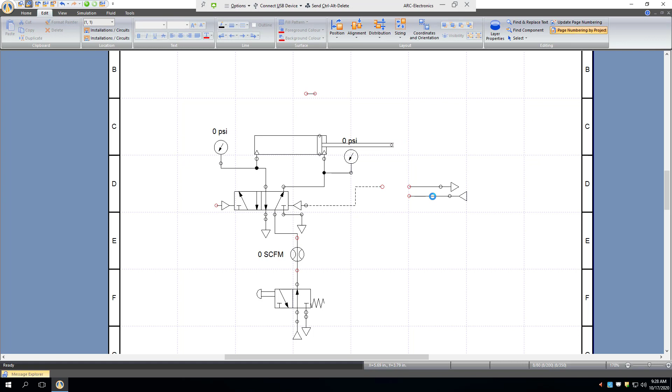Okay, we're starting now from our project that we just completed, Part B, and we need to eliminate many of the components to get back to the diagram which they're showing. So let's go ahead and get rid of that valve, and let's get rid of all the control piping and exhausts, this valve piping. Good.

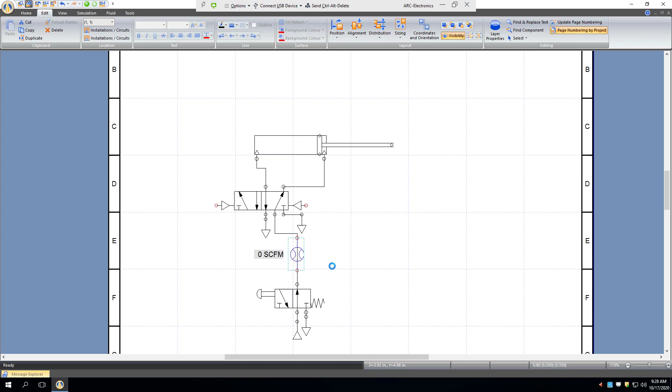And it looks like we're getting rid of our measuring and our flow control. Okay, that's good for now. Let's see what's going on. Okay, that looks like a good start.

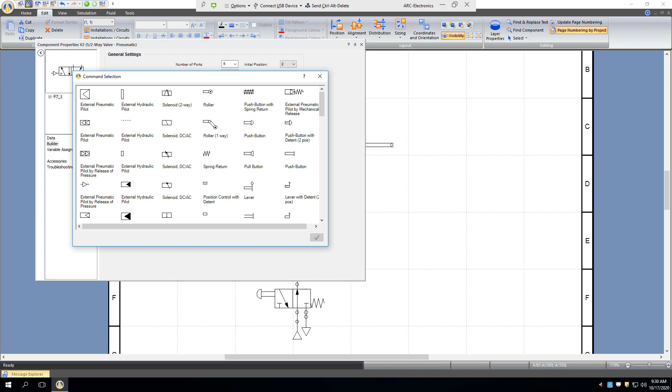So let's go ahead and open up our valve. And we're going to go to technical specifications. We're going to go to builder. And we are going to get rid of our pilot valves. And we're going to put in an AC/DC solenoid on both of them. And that looks good.

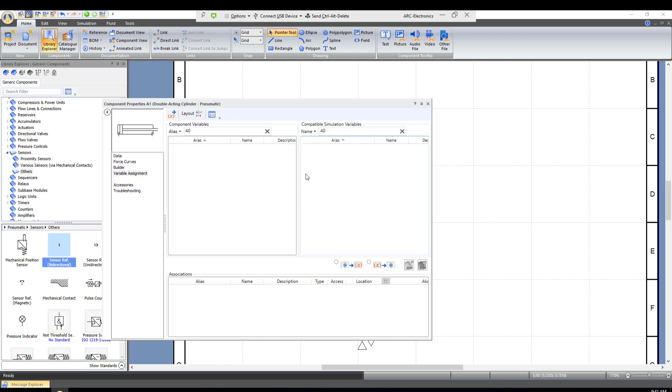The next thing we need to do is go back to our Library Explorer and go back into Pneumatic and go down to Sensors, Others, and we're going to grab a reference sensor. And this is at the 0%, and we're going to call that A0. And we need another one. But first thing we need to do is open this up, go to data, and we need to run this out to 100%.

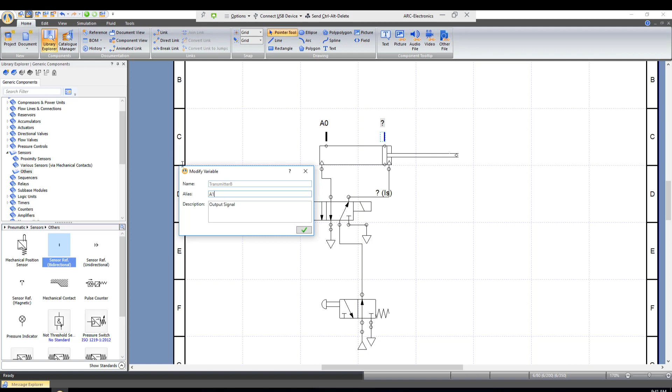And let's grab another sensor, and we're going to match up our triangles, and we're going to call this guy A1. Good. And then they want us to bring this back to 0. So let's go back to data and 0.

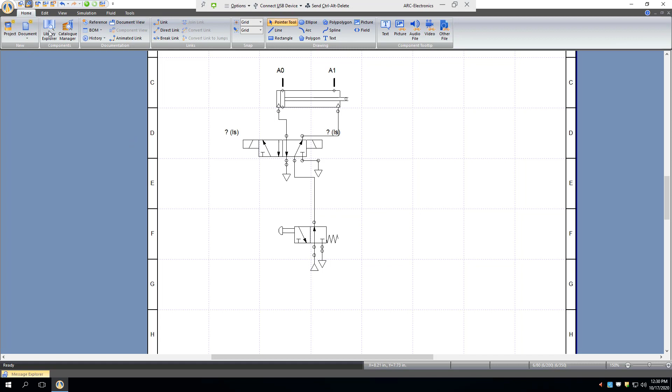Good. So, okay, let's build our control circuit here. So we have Library Explorer, and we're going down to Electrical Control JIC Standard, Joint Industry Council, and we need power sources. And I'm coming down, I need a 24 volt. We'll put them there. And I need a common. Let's build our first rung. And we're going to need a switch, normally open push button. And we're going to call him PB1, capital PB1.

Whoops. Okie doke. Alright, next thing we need is a sensor switch, and we're going to use a normally open proximity switch. And we're going to need another one, so let's grab another one. We'll use him in a little bit. And then we're going to need a coil. Output coils, and we're just going to use a standard AC/DC coil, and he's going to be called C1. That was our alias. Good.

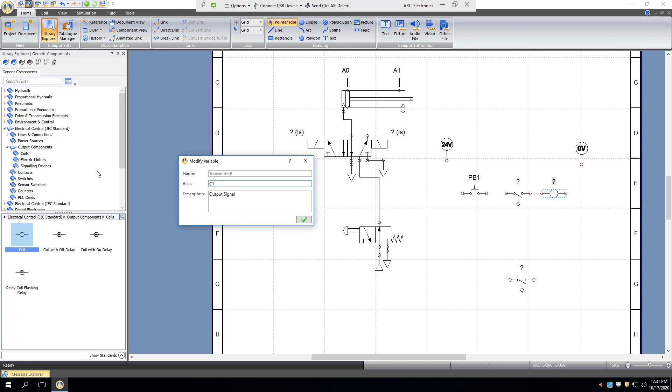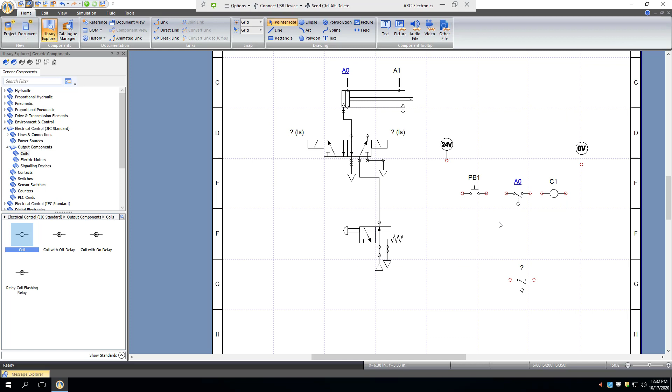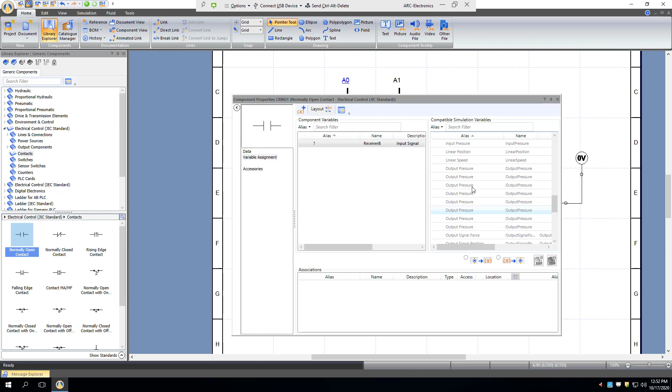Let's finish the second rung. So we're going to need a contact. So let's go under electrical JIC and contacts and a normally open. And this one is going to be called C1. So let's go down and see if we can find a C1. And there he is. Okay, and then we're going to have a solenoid. So that should be output component, solenoid AC/DC. And that is going to be an A+. Good, so let's take our link tool. Good.

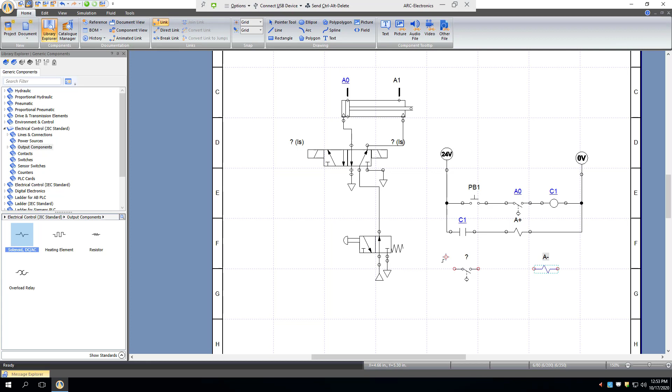Okay, so let's finish our final rung. So let's go ahead and go back to our pointer tool, put him in here, and we need another solenoid. And this one we're going to call A-. And let's take our link. Okay, good. So now what we need to do is go back to our pointer tool. Let's get into this guy and receiver B, and he is going to be A1. Actually, that looks pretty close to what they asked for.

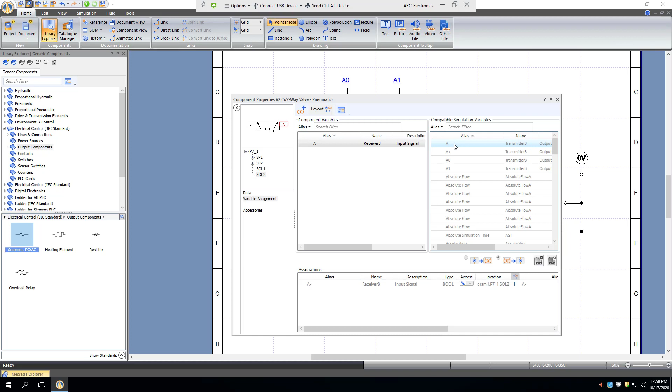Good. Okay, let's link our components. So let's go up and open our valve. And our receiver, which one is this guy? This is LS receiver B, and that one should be A+. So let's grab A+. And it should replace our LS with our A+, and it does. So let's go ahead and double click on this guy. And we're going to go to this one, and that one should be A-. And that looks good. Okay, I think we're done.

Let's go ahead and simulate it. So here we've got simulation button, and this guy is good. So we got air to our system, and let's go ahead and push the push button one, and it's working perfectly, and it's cycling back and forth. Good.

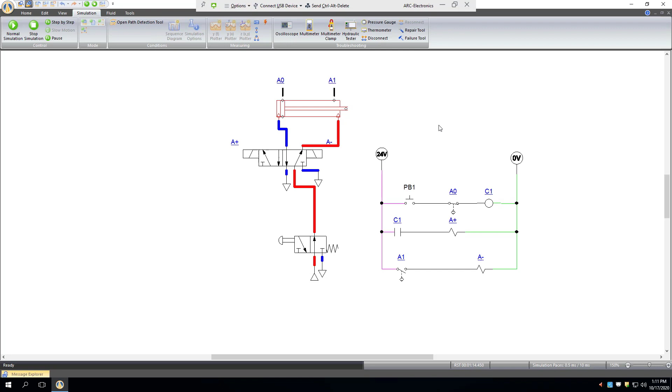Okay, here's the start position. For some reason this valve moves back in this direction, and we have pressure to the front of the piston, which retracts the cylinder, and we exhaust through here. Alright, I put this simulation in slow motion, and what's going to happen here is this cylinder is pulled all the way back. And this is a proximity sensor here.

Typically they're reed switches, so they'll put a magnet on these pistons. And the switch here is a reed, which the magnet will change the position of that and close it. And in this case right now we're back, so this is closed. Once I push the push button 1 down, this contact's going to go on, this is going to close, and our solenoid A+ is going to push the valve to the other position.

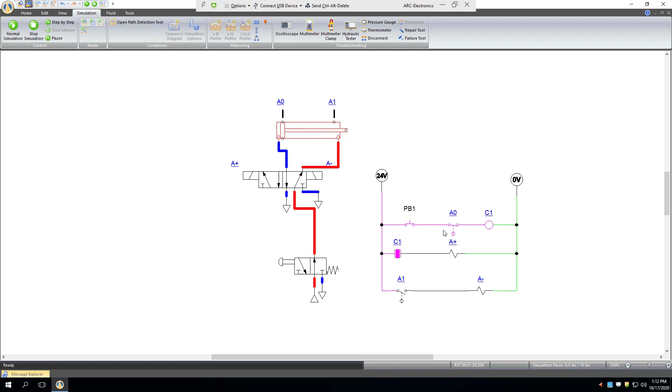Once it gets to the other end, A1's going to close, and A minus is going to energize and push it back to the original position. So let's watch it here. Forward and reverse. Forward and reverse. Forward and reverse. Good.